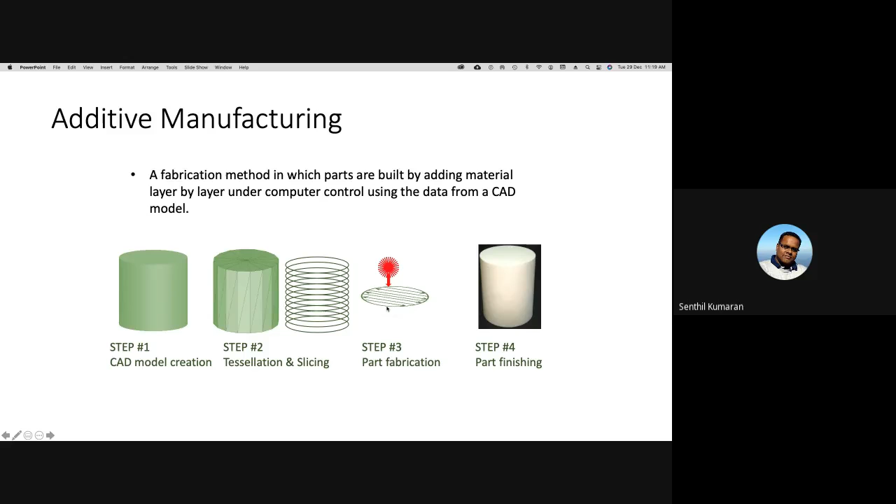The material that you use could be in any different starting shapes - it could be a liquid, particles, a molten material, or solid sheets. And then the way you are producing these individual layers - you've seen that layers may be produced by a high intense energy beam, or photopolymerization reaction, or by gluing it, or by ejecting a small amount of polymer. There are a lot of different process techniques available, and they can also come under many different ways in which these 2D layers are produced.

You can produce one-dimensional channels, or use two different sources and produce two one-dimensional channels, or have an array of one-dimensional channels which actually moves along the X - it's not like a hatching, but like one line which is actually moving. Or it could be the entire layer, a 2D channel, where the entire area is exposed and the entire layer is produced at once.

So there were many patented technologies, and they had mind-boggling acronyms. You have SLS, selective laser sintering. LENS, laser engineered net shaping, developed by Sandia National Laboratories. We have shape deposition manufacturing developed by Stanford, SLA developed by an independent company, 3D printing developed by MIT, and FDM developed by a company called Stratasys. Then you have Envision Tech and others based on digital light projection technologies, also called CLIP. There's a company called Carbon which produces these.

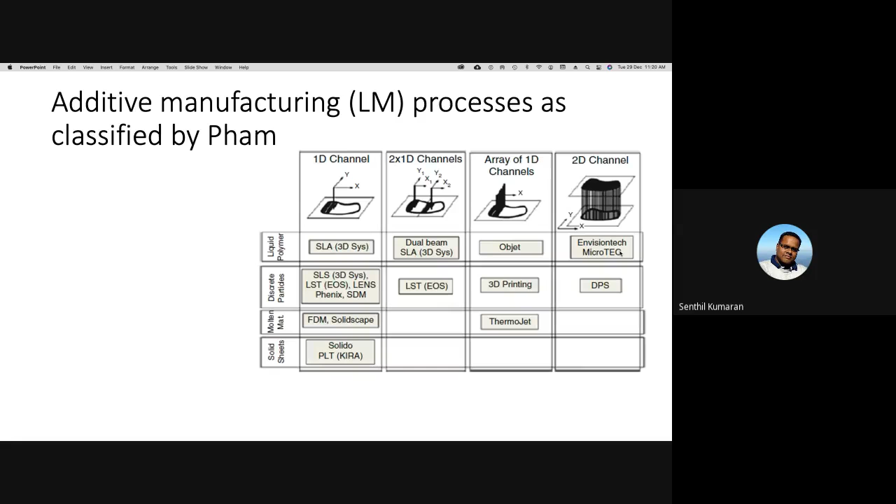So there are so many of these acronyms which were patented. They slightly modify the applications and then patent it. So in order to avoid using these acronyms, to generalize the names, ASTM has given this generic classification and also defined many processes.

Here I have a VAT photopolymerization process, which typically has a photopolymer or liquid in a container, and then uses laser energy to selectively polymerize the monomer, because these are photosensitive polymers. When a photon can initiate a polymerization reaction and solidify that liquid selectively wherever the light energy falls, that way you create a thin solid layer, one on top of each other.

So you can see that this works. I'm not going to teach you about the schematics, I just gave the schematics so that you can read it, and in your courses probably you will be reading more about this. There's a rapid prototyping course or additive manufacturing course where you will be reading about all this process and how it works, but I'm just trying to give you the lay of the land.

So there could be a powder bed fusion where you are fusing the powder particles together. You may be extruding a thin filament of material by heating it and extruding it through a nozzle, or sometimes you use a simple inkjet type process where instead of ink you put the resin and then jet it, or you can pre-lay the powder bed and use a binder to jet. Both processes work the same way, but here the material is a resin jetted onto the platform, and here you have a pre-laid powder bed where the binder is used to glue that powder bed in a different layer. Or sheets of paper or metals can be laminated one on top of each other.

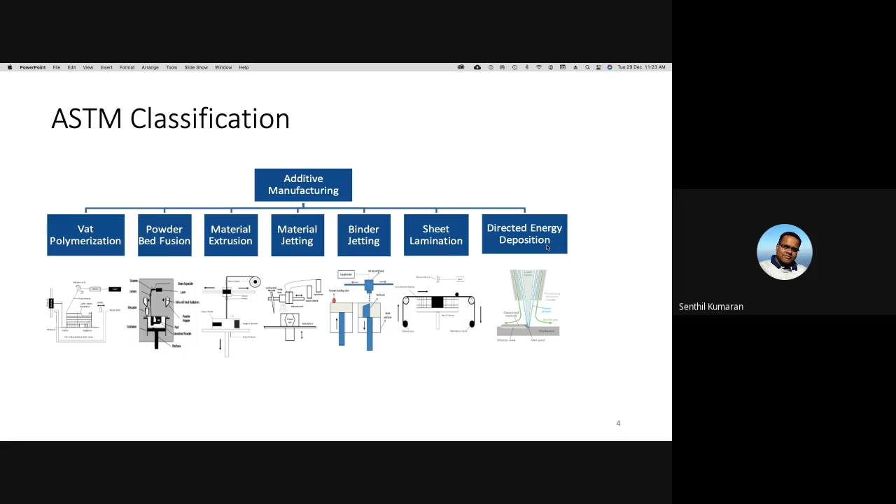Okay, so now if I just step back a little and look at it from a broader perspective, all these different technologies may have different processes. For example, powder bed fusion can have many different technologies, such as selective laser melting, selective laser sintering, and electron beam melting. Similarly, under directed energy deposition, you have direct metal deposition and laser engineered net shaping. So there are minor variations in the processes and mechanisms.

For example, these are the two major metal AM processes, but recently there are many different processes that also come under metal AM process. For example, binder jetting is a metal AM process. There's also something called joule printing, which works on resistance heating. You can also have cold spray based additive manufacturing as a metal process, but these are predominantly more commercially used. So there are many different techniques available, but we are more interested in looking at metal AM process from the perspective of powder bed fusion and directed energy deposition.

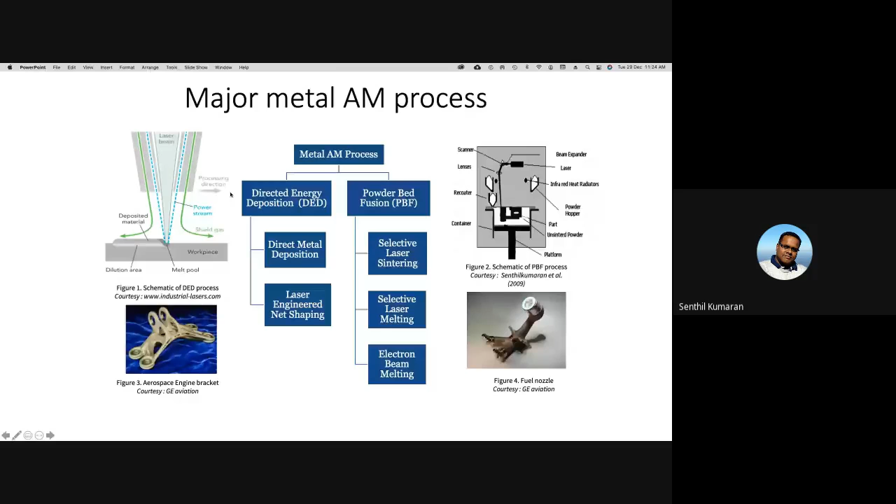If I look more closely into the powder bed fusion process, there are many different mechanisms. As I suggested, you have powder particles, and then you have to heat the powder particles to fuse them together selectively wherever you want to create the layer or the solid.

The rest of the regions remain as a powder, and then you create layer-by-layer solidification or consolidation of the powder particles, or coalescence of the powder particles. You normally get a three-dimensional object which has a very rough, poor surface, but later it can be processed to get smooth surfaces, right?

So the mechanisms by which this can be done - there are 4 different classes. It could be solid state sintering, where you don't use any full melting at all. Everything is done in solid state. You have 2 powder particles, and they are not taken above the melting point, but to a sufficient temperature where the viscous forces are used to overcome the surface tension forces.

Because the powder remains a powder due to its surface tension energy, you try to overcome that by a viscous force so that the powder particles join together and then become a solid, or necking can begin, and then it consolidates. These are the 2 powder particles, and there is necking, and then there's diffusion of material, which is typically called solid phase sintering.

Liquid phase sintering was also widely used, I think from 2003 to 2012, but it is no more popular. It's only useful for ceramics and composites, but not widely used in powder bed fusion involving aerospace parts or high dense parts. But this could be also another route - for example, copper bronze and nickel bronze type systems have been there, commercially available. In India also, we had a few machines very early, like 2003 and 2004, which involved these kinds of mechanisms.

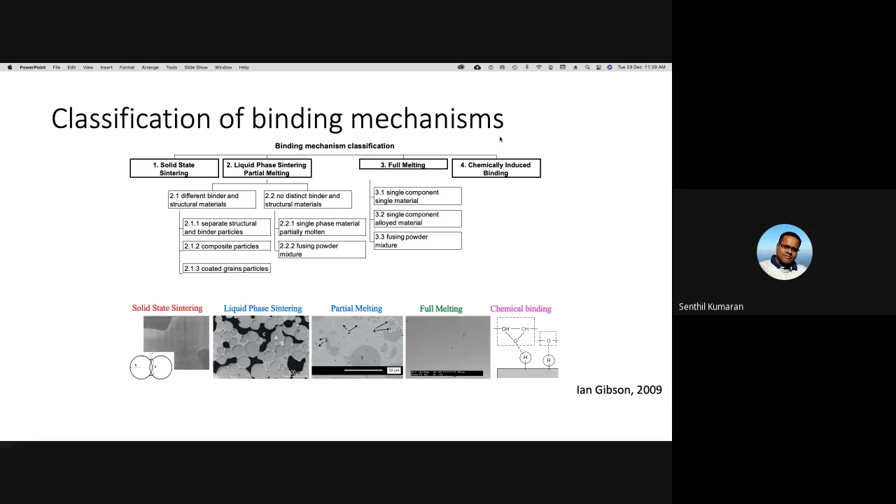Hereafter I will be starting to discuss the design aspects of this process, so that you will be able to understand what really these processes have done over the years, why people are interested in design for additive manufacturing and things like that. But before we go on to the design aspects, I will tell you about the research that is happening in additive manufacturing.

You see that there are multiple research fronts. One is in processes. People develop new processes. They work on something like joule heating, or maybe induction heating, or sometimes novel techniques to create that layer. So that is one research area that people have been always doing.

Another research area is in the materials aspect, developing novel materials with the existing processes. So superalloys like Inconels, and also titanium alloys, which are lightweight and have high corrosion resistance for medical and aerospace applications. A lot of these new materials are under development.

There is also a science aspect. For example, I work on science too, where we develop prediction algorithms and models based on first principles of engineering. This means you construct a model of the process and eliminate the iterations of trial and error. When you're trying to produce a part with a particular strength and dimension, you may have to iterate until you get that strength and finish. That iteration can be minimized if you have science-based prediction tools built on first principles of engineering.

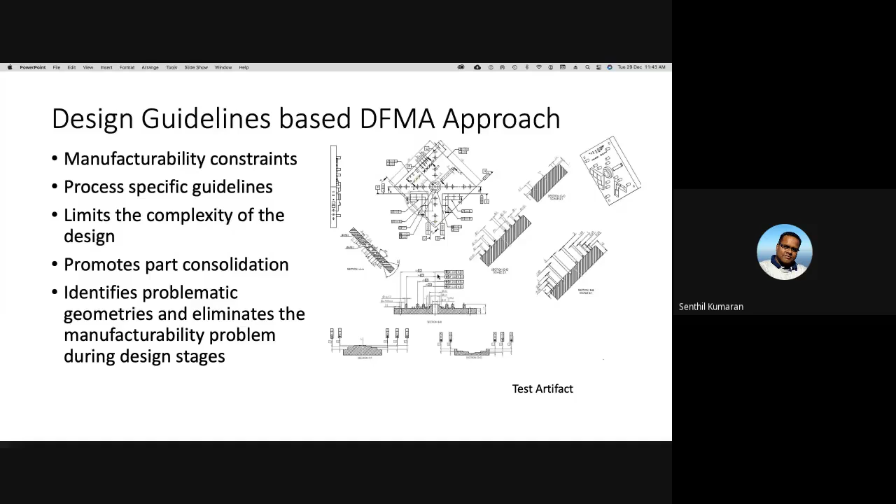So I'll give you an overview of the metal AM process so that you can better understand the design constraints and process planning constraints. Then we'll go to the opportunistic exercise.

For example, this is a typical structure of a metal AM machine. These machines are a little expensive, though recently they have become relatively less expensive because some patents have expired. But still, when you want to use exotic alloys, super alloys and titanium alloys, it's going to be expensive.

Machines are available for less than 1 crore, but otherwise it could cost 8 to 9 crores, even for a small build volume like 400 by 400 parts. So relatively they are very expensive and used only in niche applications, not for mass production as of now. But we'll see where the trend is going and how it can be used for mass production in the opportunistic exercise.

If you look at the setup, there's a CO2 laser, an optic, a mirror. Layer by layer, the part is produced and the platform moves, with a recoater, which is nothing but a blade. Sometimes they use a roller instead to spread the powder from the powder chamber or container. It slightly moves up so a layer of powder can be spread on the previous sintered or melted layer, then the next exposure happens, followed by spreading for the next layer.

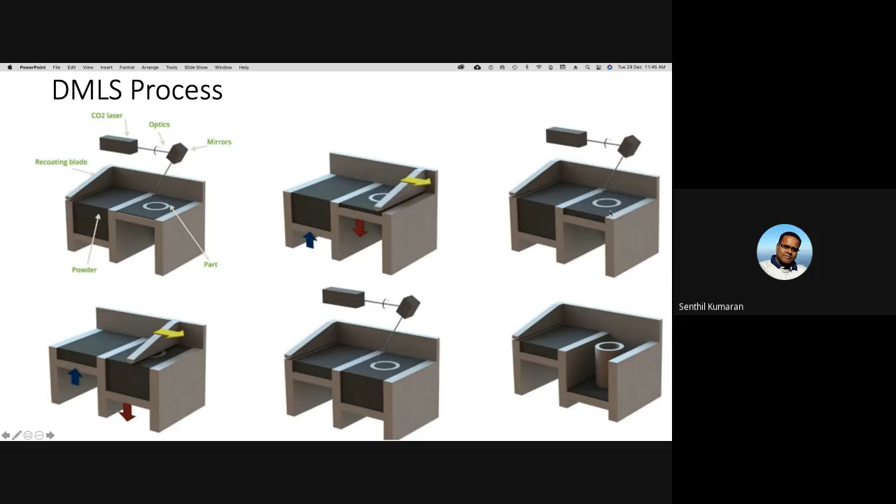Like that, the part grows inside. You can see the cylindrical part produced here with a hollow hole inside - a hollow cylinder being produced. Because of the layers, you can see two concentric circles, and then they fill this inside region with hatching, and you get the part like this.

The procedure is that you have a build plate, called a substrate, on which you can stack multiple parts - not just one. You can put, let's say, 5-6 parts together on the platform and build them layer by layer. At some point, once a particular layer is built, you have a cutting path to cut these parts out, then you mill the platform, or use wire cut EDM to machine it, and reuse it again in the machine.

So this is the platform on which the part is being produced. Multiple parts can be stacked on top of it, and then at this area you can see the cutting path is typically varied, so you can machine them easily and finally produce the parts with reasonable accuracy.

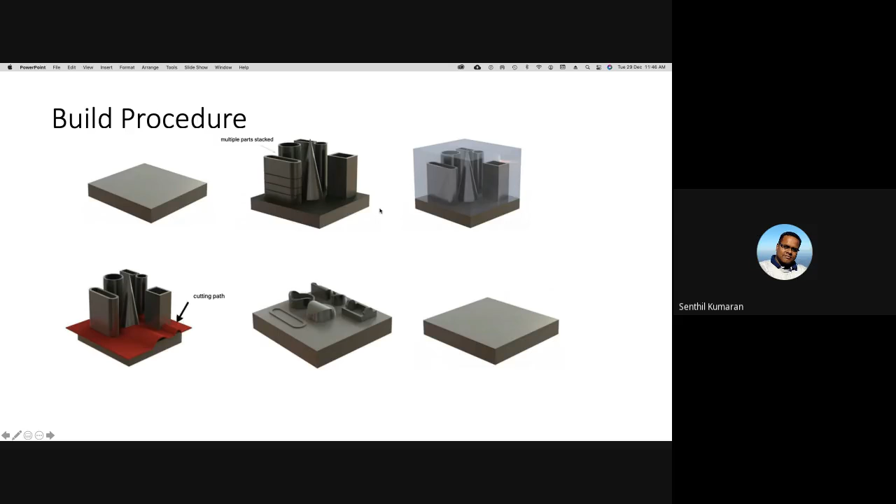Okay, so now, what are the design and process planning guidelines?

I will quickly take you through this, and then I will go into the design for additive manufacturing a little later.

One of the very important things is the orientation. Let's say, for example, this particular cylinder. When I slice it with a layer thickness of 50 microns, if I orient it upright with the base on the platform, the number of layers is always going to be extremely high, isn't it? So orientation is a very important problem.

For the last 25 years, people have been solving this problem of orientation. In fact, in Thiagarajar College of Engineering, there are many theses on orientation and optimization of orientation. Even some of my seniors and juniors have done a lot of work on optimizing build time, cost, and support structures.

All those things they want to eliminate by deciding a proper orientation of the part. Let's say if I orient this cylinder in a flat way, I could have had fewer layers, but the problem is you have overhanging surfaces. I'll show what an overhang is in the next slide. To avoid that overhang, you cannot build something in mid-air, so you need to build supports.

Let us assume you are building a house. When you are building walls, you are building one brick over the other, so the previous brick supports the next one. But when it comes to building RCC, the reinforced cement concrete roofing, there you have to put a scaffolding. Scaffolding means people provide some temporary support structures to support it, which they remove after the roof gets cured.

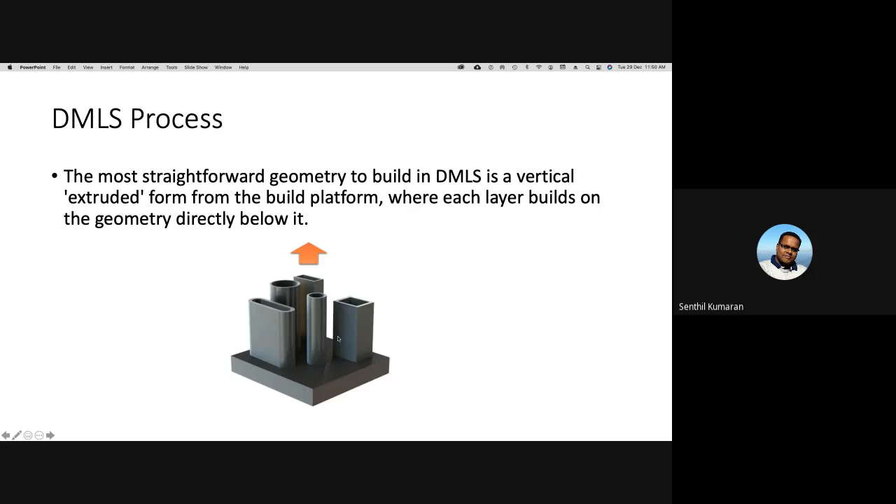So some of the design guidelines I would like to walk you through very quickly, and then probably we'll go to the detailed discussions about the capabilities.

Now let's say you have a small hole, on this platform. If you have a hole more than 6 mm, you need a support structure; if less than 6 mm, you don't. If the hole is only provided for access to something, you can minimize its diameter. In some cases people want to reduce weight, that's why they produce the hole.

Sometimes in some applications you must have seen they machine the inside region out because they want to reduce the weight of the component. Structurally, they want to make the component strong but have high stiffness, a good strength to weight ratio. For example, this material may be machined out just to reduce the weight of the component.

In that case, you can redesign. So you need a support structure here. For example, this is the overhang, you cannot build this top region, this region cannot be built. So now, to avoid this overhang, you can actually modify this hole like this.

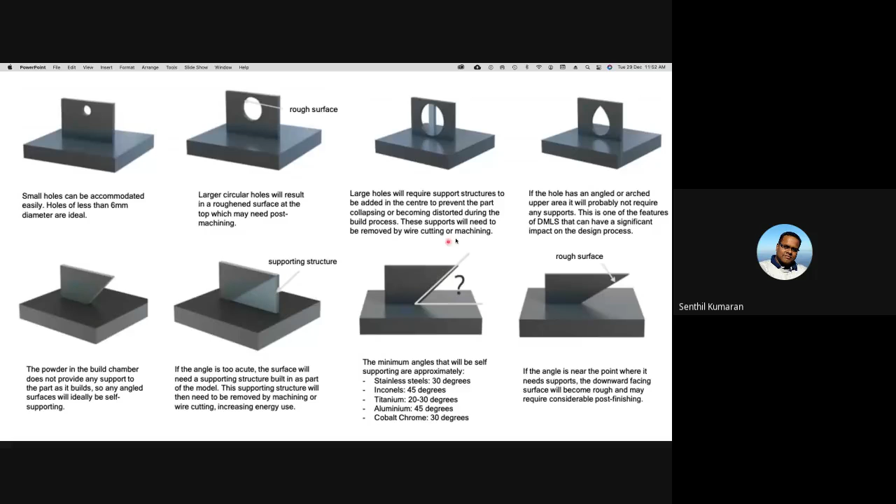That's what most of the things are about. I think you must also understand that additive manufacturing mostly works by services, right? Because these machines are very expensive, not all industries can afford to have them in-house. Only very technology intensive, high capital investment companies can afford to put it in-house. Normally medium and small scale industries use it as a service. There may be a service bureau with many machines, and you go to them, give your part, they manufacture it and bring it back. That is how it is normally done.

So the guys at the service bureau, we call this servitization or uberization in manufacturing, which is another reason why additive manufacturing is advantageous, because you don't have to manufacture it in-house. You can uberize it.

You can send parts across the world through mail with some blockchain, and then you can protect your IP, still manufacture and get the part back. There are a lot of workflow chain softwares available, so you can make it distributedly without having to have any factory at all. That's another reason, we'll talk about it when we come to the opportunistic part.

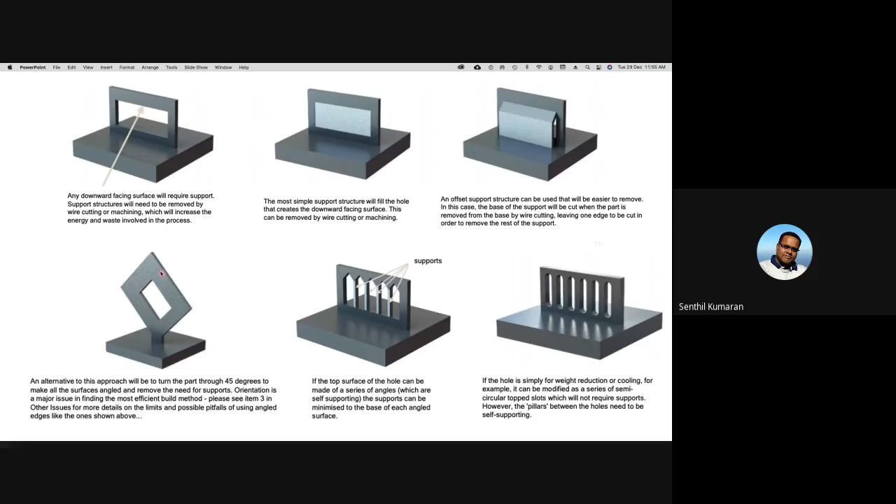But what happens here is you have the supports built in. These supports can be eliminated by having, let's say, a simple weight reduction or cooling. It can be modified as a series of semicircular, topped slots, which does not require support. This is a redesign, a constraint-based approach. Instead of this, I'm suggesting to use this so that you eliminate the support structure, eliminate cutting, eliminate the need to orient it, and these surfaces can become really rough because of stair stepping and other things. So it's actually the best design to go forward.

These are some process planning guidelines, like when you have a part and the recoater blade is moving, what normally people do is you cannot have the orientation of the part parallel to it. This is not advisable because it can actually take the part out of the platform.

Because the surrounding is powder, this is the only region which is solidified. When a very large section which is parallel to the blade is there, it can actually take the part out of the powder platform. So those things can be avoided. You can slightly orient it in such a way that only a small area comes into contact with the vertical blade, like an L shape. These kinds of things are some guidelines.

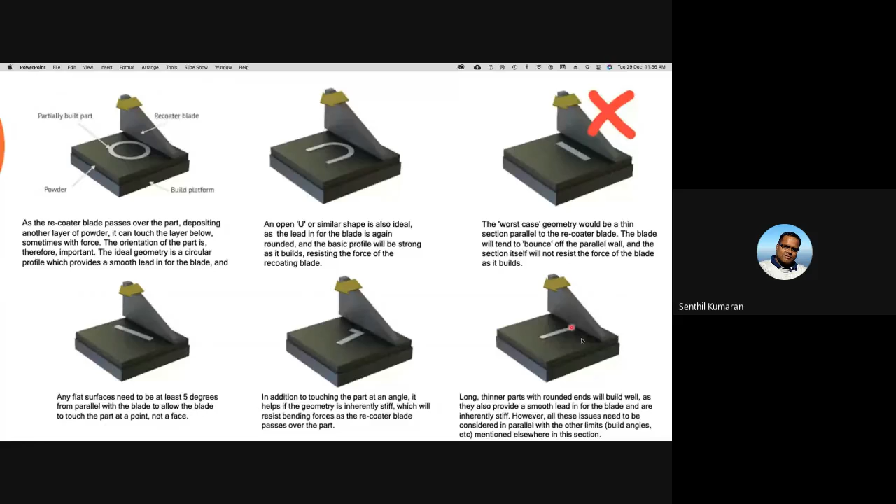Similarly, you have long slender structures with an aspect ratio of 8:1. When it's going to be built like this, there may be sagging and other deflection and buckling type effects. To avoid that, you can actually have a joining in the middle.

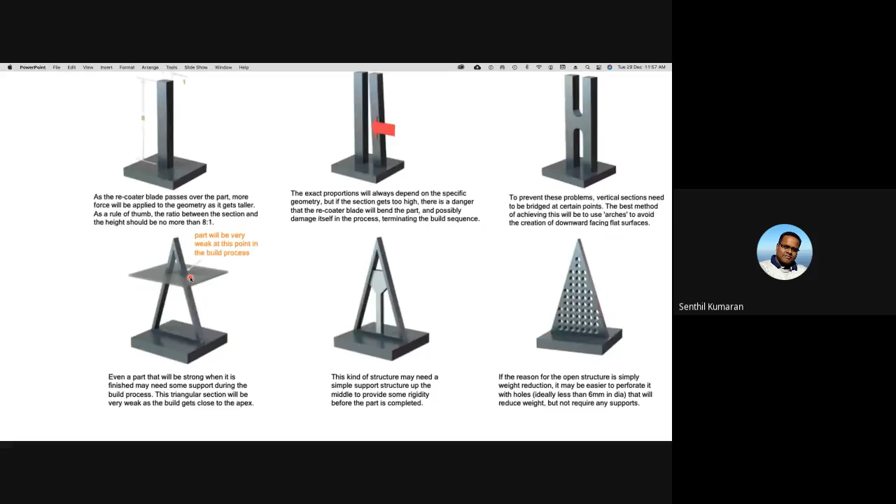Also, when you have two angled cross sections meeting at some particular point in height, it will be advisable to use something like that rather than this way, so that during the build process, the supports may have to be built at certain heights, and then removal becomes very challenging, because machinability is a very challenging thing. The problem is once you get the part out of the AM machine, you have to remove the supports only by machining, and the conventional machining problems all kick in, like tool accessibility issues, occlusion issues, gouging issues. So all those issues may prop up, and in order to avoid those things, you have to redesign something like that.

This is another bicycle example. This is the original design, and you can build offset surfaces like this, or slightly modify it as a serration and build offset surfaces, or orient it this way and modify the design extensively. You can see this is more organic and more easily buildable in metal. So the bicycle pedal from a conventional manufacturing process, like a forging process, can be taken to additive manufacturing to design something like this. This is what design for additive manufacturing is all about.

So you are basically advising that designer to modify the design in such a way that you come to this particular point where it is easy to manufacture, and also it looks more organic. There's no need to remove support structures, and it can be built very easily, but it may consume a little bit more cost when trying out these parts.

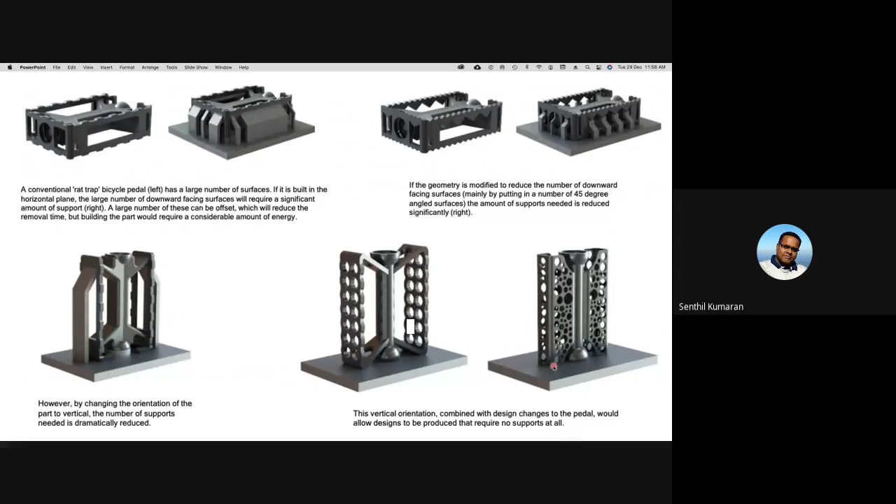There are other guidelines too, like sharp edges, because when you have a sharp edge, stresses start to concentrate on those regions, and the stress concentrations can produce cracking and ultimately failure. Also, having a thick section may cause it to be lifted up, there may be delamination, and angles facing into the recoater blade may cause the part to distort out of its position on the build platform.

Having sharp edges is not correct, so you can see there's a rounded edge here instead of a sharp edge. Also use the wire cut removal path in some cases. Let's say, for example, when you are trying to remove the parts from the platform, some parts may need wire cut paths, such that a simple straight cut may not be suggestible, because it is extremely difficult to understand the orientation in which the part is built when you do a straight cut. You lose all that information. So when you put an angled cut, then you know what is the Z direction and what is the XY longitudinal direction.

You must always be aware that additive manufacturing produces anisotropic parts. The Z strength is always poor because the layers are made in the Z direction, so the strength is always poor in the Z direction compared to the XY direction. The Z direction is the build direction in which the layers are stacked. That is why you need to always worry about the orientation of the part. You have to always do an over-design. Over-design means, let's say you have 300 MPa strength in X and Y, but maybe only 150 MPa in the Z direction. So you have to do an over-design for that 150 MPa, putting more material there to take care of that lower strength and ensure good overall strength.

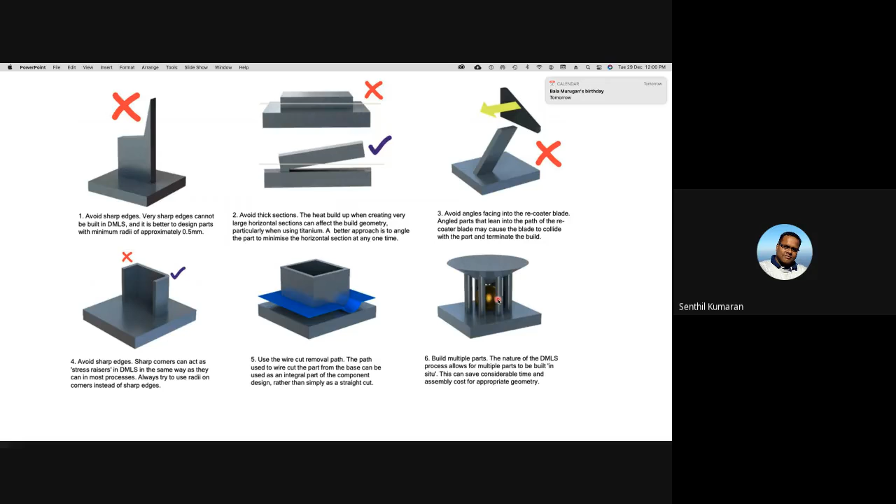So these are some aspects of the wire cut path. Also sometimes the parts get tangled inside, so you can eliminate those tangled parts. And as I said about support structures, remember we were talking about supports. A large amount of support structures needs to be built and then removed, so designing, building, and removing them is cumbersome.

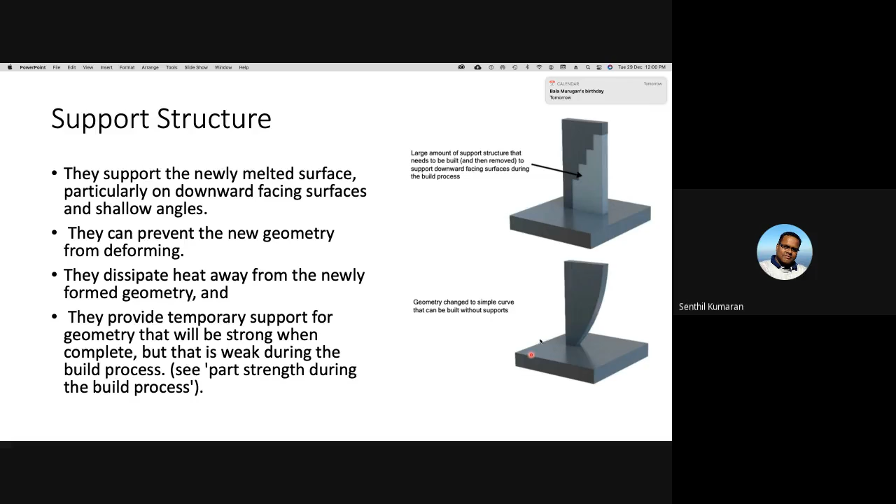So you can modify the design. Instead of a flat surface like this, you can actually have a curved surface, which could have very good benefits. Similarly, when you have produced a support structure, let me show you - let's say this is a small hole here. Can you see the small hole here? This can be provided to basically have a wire cut path.

Because you are going to insert a wire and then do wire cut EDM to remove that support structure in this vertical direction. I think you all know how wire cut electro-discharge machining works - you need a wire, and that wire needs to pass through this path so it can cut. Or else you can put an offset surface, or something like a buttress support instead of building it from the bottom. All those things are possible.

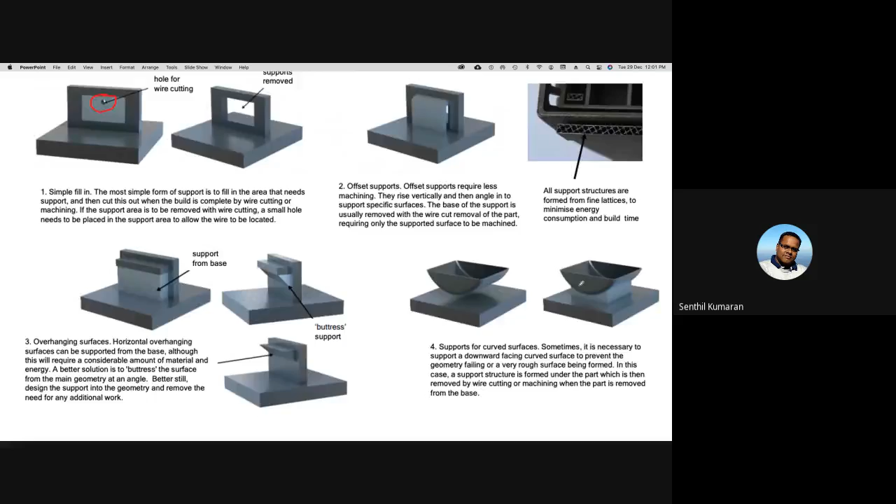Also, sometimes it is necessary that downward curved surfaces be eliminated so that no support structures are needed, and there can be many different problems like this. A lot of people paint a beautiful picture of additive manufacturing, but it has got a lot of inherent problems. In India, a lot of additive manufacturing research is not happening in many universities, because they still believe this process has lots of research to be done. Many industries are reluctant to adopt this because of the various problems you see.

Additive manufacturing is envisioned to be a net shaping process, but still you need to do machining, support removal, sometimes heat treatment, hot isostatic pressing, infiltration, electroplating, and sometimes sintering again in a vacuum sintering oven. So you see a lot of huge post-processing cost is involved in making the parts as good as a wrought part, a cast part, a forged part, or a rolled part. People would normally like to see the parts as net shaped products.

So there are a lot of issues. That is why the additive manufacturing community in US, in Europe, and in Japan are trying to address these issues. There is very active research going on because there are a lot of advantages, which I'm going to explain in the next part of the lecture. But to take advantage of those design capabilities, you need to eliminate these kinds of problems. So that's why a lot of research is happening. But in India, slowly research is picking up.

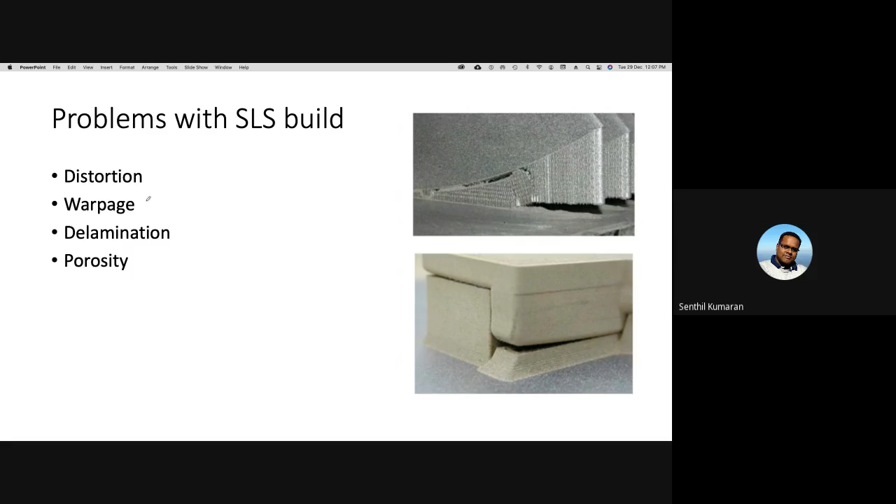You could use one layer parallel in one direction and another layer parallel to Y, or maybe something like a checkerboard pattern. Many different patterns have been evaluated to understand how this thermal buildup happens, how stresses get generated, and how these errors can be eliminated. It's an ongoing research area, and many papers are being published on this.

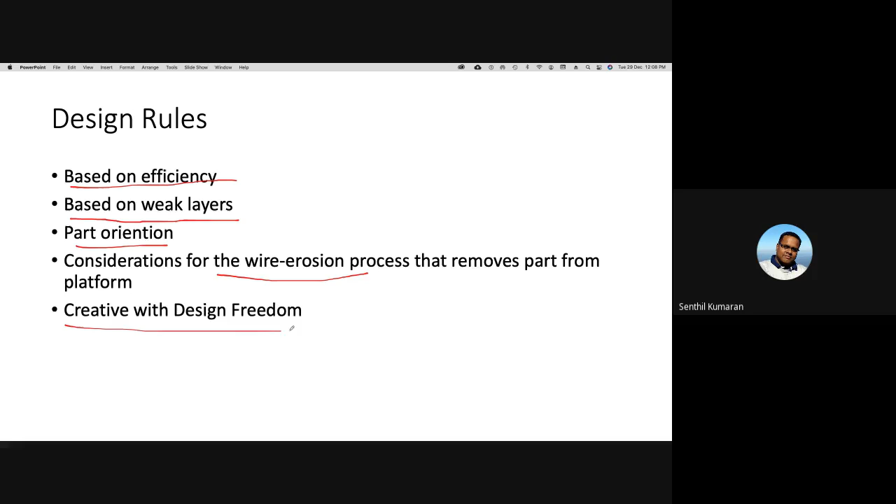So if I summarize all these aspects I discussed: most design rules are based on efficiency, weak layers, part orientation, and some considerations for the wire erosion process where holes must be provided for removal of material. We've also seen how to be creative with design freedom.

Now, what are the design opportunities aspects? This is the second part of my lecture, so I may not spend much time here, but I'll give an overall view. I teach a 40-hour course called Design for Additive Manufacturing to my students, and I'm just giving the introductory part of the slides here.

This is the first slide, the first lecture that I use. Then I use 40 hours of lectures to explain this entire concept to the students. In Stanford and MIT, it has become part of the undergraduate curriculum.

Design for Additive Manufacturing has become so important that it is now a core course in Stanford Mechanical Engineering, a core course in MIT, and also a core course in UC Berkeley for undergraduate students in the third semester. It has become so important that people have included it in the undergraduate curriculum itself.

We also offer this for master's students, but not at the undergraduate level. I have an online portal called dfam.in, and also a Swayam course where I teach this online, so you can join. I also conduct DFAM workshops where I discuss many different opportunities.

Let's look at the opportunities that additive manufacturing presents. Initially I mentioned that around 2011 people started appreciating the nature of additive manufacturing, and why it became so prevalent. The reason is like this: in conventional manufacturing processes...

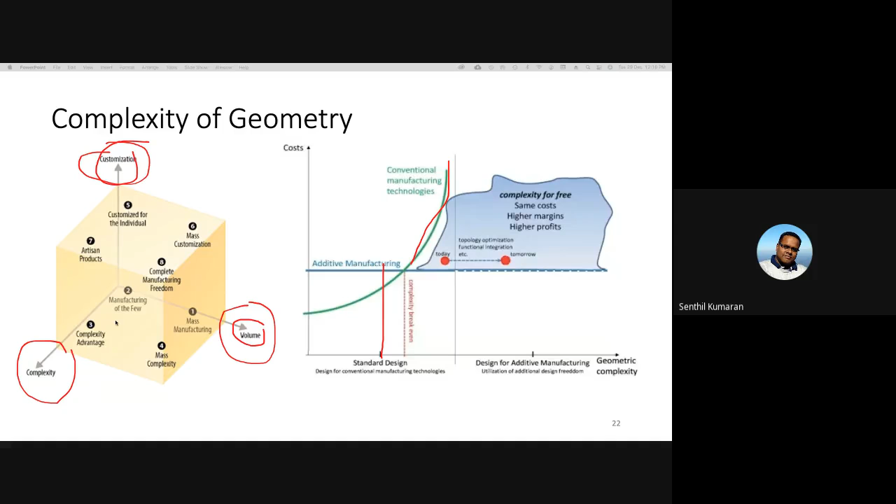Let me just look at what those complexities are.

Before we go into that, let us take a simple die casting example. I always give this example to students because they understand it really well. In die casting, you need to add draft angles because the part has to be removed from the mold, from the die. So in order to remove it from the die, you need to give a draft angle. This is the design space, but there is additional design space possible. This degree of design freedom is not so high in die casting.

Whereas in SLM, a additive manufacturing process, selective laser melting, you don't have to have a die or draft angle. Also there is no need to give uniform wall thickness, but here you can have mix and match. So there is weight reduction, and there is also very high design freedom. And also undercuts, these kinds of undercuts are very difficult to remove from the mold.

Because when you design like this, it is very difficult to remove from the mold, so those undercuts have to be avoided in die casting. But here you can have consolidated parts in which there is no die, no part removal from the die, so there is no issue. Also, small distance between features is not possible in die casting and injection molding.

Here it is also possible, so you can see the exemplary benefits: reduction in design space, weight reduction, consolidating multiple parts together, and again the reduction in design space. These are some of the advantages.

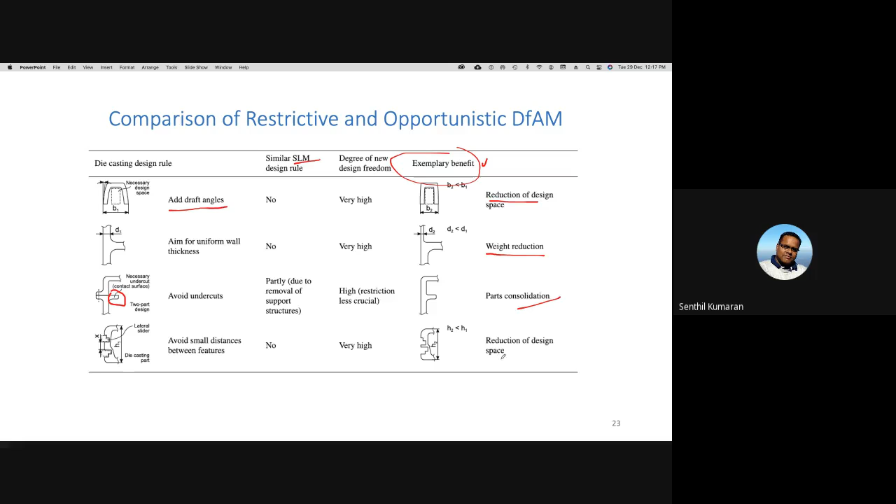So what are the major drivers? As I said, for additive manufacturing it is mass customization. I already explained what mass customization is: you are able to mass produce components at the same cost as a customized part. So you are producing customized parts at the cost of mass production. That is mass customization.

And functional integration. Like you would have seen, now people are trying to bring multiple functions into one part. I think I have not shown you multiple examples from real world case studies. You can just go to Google and type functional integration, and you would see an excellent amount of examples of people functionally integrating parts together, like flame retardance property, electrical property, acoustic property.

Let's say you have a car body, right? Now I want to print, let's say, batteries inside my interior surface. On the outer surface, I want to print my photovoltaic cells. And in between, I want to have a lattice structure, which is a phononic bandgap material that can only send certain frequencies of sound so that there is no noise in the cabin. So one single 3D manufactured structure has multiple functions: acoustic shielding or acoustic function.

Also, it has energy storage function by printing micro batteries. It also has solar energy generation function with solar cells. And also it has functions like impact energy absorption from shock, right? So then you have structures for that.

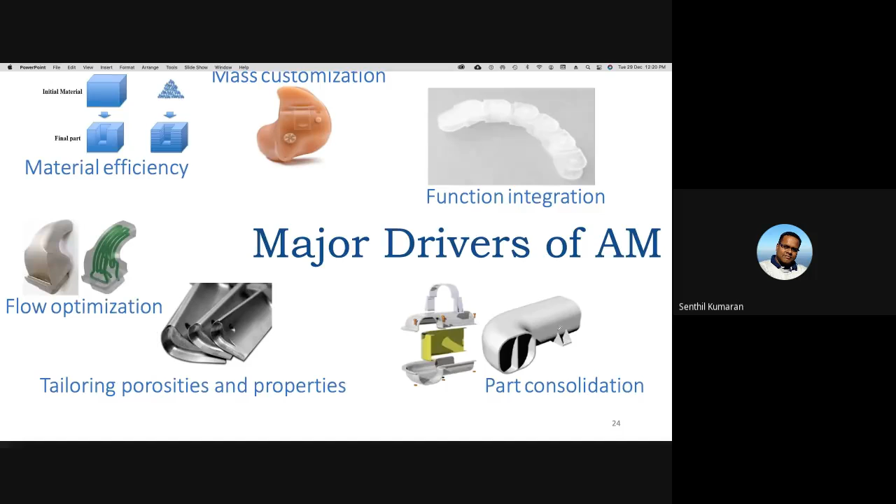So these are the complexities I was talking about: shape complexity, where you can include lots of freedom in the shape; hierarchical complexity, where the same structure repeats in multiple scales; and material complexity, where, as I said, you can have batteries, PV modules, sensors.

Now, I think many of you must have heard this term - in addition to additive manufacturing, you also have IoT, Internet of Things, as one of the very important aspects of the fourth industrial revolution, right? IoT is nothing but four different things: having a sensor to collect data, transmitting it over a network, doing analytics in the cloud, and presenting the results in a dashboard or through prescriptive or predictive analytics. That is what IoT is all about.

IoT needs physical devices also. For example, you need a sensor - that sensor can be directly produced using additive manufacturing. And you need a network, for example RFID antennas or other antennas, probably circular antennas. In fact, I ran two impact projects on 3D printed antennas.

One is for energy harvesting applications for military, and another I'm doing for sensing physiological parameters in soldiers during training as well as on the front field in battle. So I ran a one crore project on just integrating the function of sensing and transmitting data - IoT plus additive manufacturing. So there are huge opportunities in terms of how you can add materials, electronic material, functional materials.

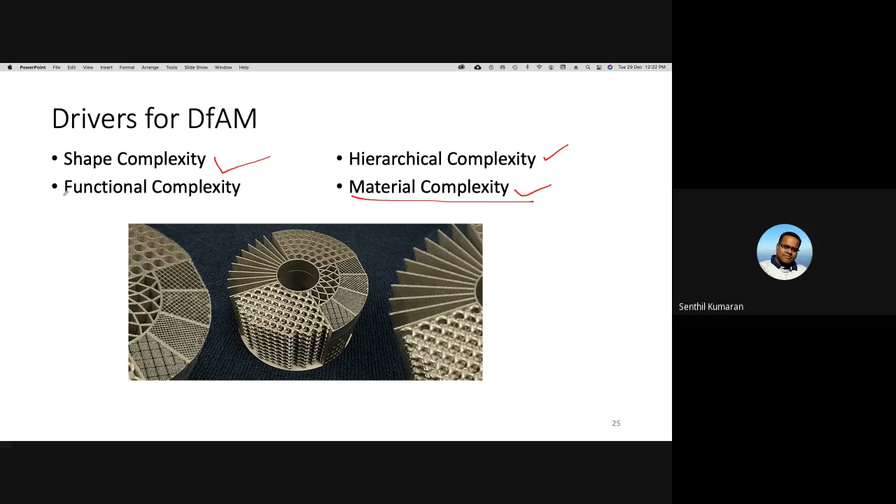So these are many applications, but this is the lay of the land for DFAM. So if you look at my course, I tell them about the geometric complexity that is possible, and here I tell them about how to basically use topology optimization.

Topology optimization is something where you can actually optimize the material use within a space subject to a set of constraints and loading. So I'm trying to minimize the compliance so that I can remove material.

So there are hundreds of such software tools for DFAM which has recently come, which industry has adopted. Maybe I can give a Fusion 360 generative design example. I have a case study. If you give me 1 hour, probably I will use my research scholars and give a very good hands-on exercise also, you can practice it.

So the problem will be created, a topology optimization problem will be created, and it can be solved in a cloud, so you don't need even very good systems for you to try it out. Probably I'll discuss with Palniappan sir, we'll do that later sometime - maybe a hands-on exercise on some of these tools which we use.

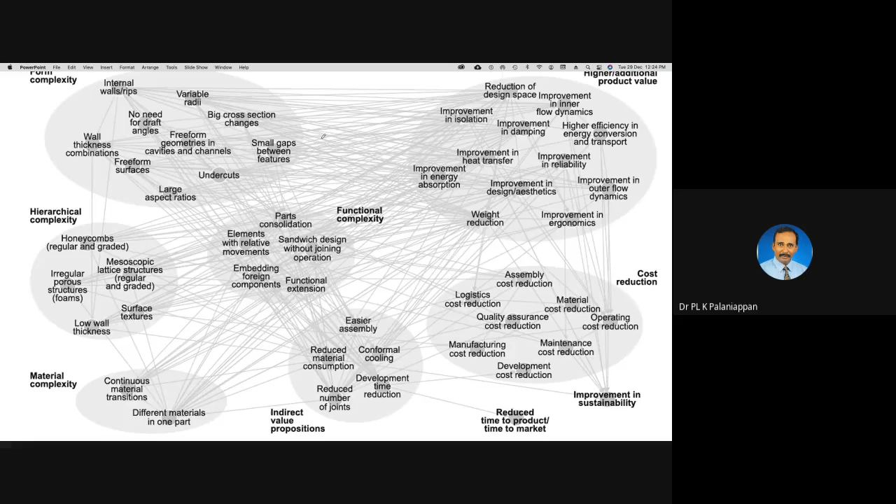So these are some of the form complexities and hierarchical structures like porous structures, lattice structures, mesoscopic structures, and material complexity like different materials into one part, and FGMs - functionally gradient structures, where you have different types of materials which are graded in nature.

Like you have a copper-nickel system. Copper is 100% in one edge, and nickel is 100% in the other. Then you have a continuous transition between the compositions, so that kind of compositional heterogeneity can be added.

And then functional complexity is about consolidating the parts and the extension of functions, embedding foreign components like sensors and other things. So you have lots of these indirect value propositions - you can actually have a lot of other benefits.

Like if you look at each one of these theses - IIT Madras, Professor Soundarapandian, he also comes from Thiagarajar College of Engineering, a proud alumni of Thiagarajar College. He has 5 PhD students, and everyone is working on one problem.

For example, one student is working on understanding damping characteristics of lattice structures. Another one is working on energy absorption - so when there is an impact loading, if you have a unique structure using additive, how the energy can be impacted. Another one is working on isolation problems, like noise isolation and acoustic problems.

Improving design and aesthetics is another issue. Weight reduction, or lattice structures, or lightweighting is another strategy by using repeated structures. Ergonomics and flow dynamics - like there's a heat transfer problem, having a complex network of channels in a hydraulic manifold, or any other cooling problem like mold cooling. So flow dynamics, energy conversion, all those aspects are being studied.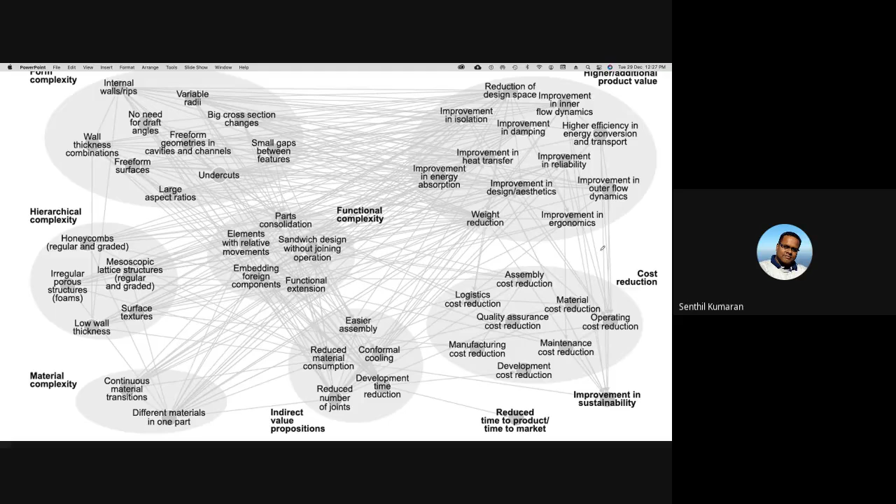So you can also learn more about it over the internet - there's a lot of material available, and you can learn and understand what are the various benefits of this. So thank you all, and if you have any questions, I'll be able to answer them.

Most importantly, this field is very new, but there are a lot of commercial packages which have come in the last 3 years, and you can actually try practicing your hands - many of them offer trial licenses.

You can download those trial licenses and try to modify an existing design which is there for machining or casting, and then modify it to suit additive manufacturing. What are the design capabilities you can add? What are the additional functional complexities you can add, then redesign it, present it in a conference, or even do a small project work or internship with industry, showcase them, and they will be happy to take your idea and redesign some of these parts. So I wish you all a successful learning experience.

I just opened up an area for you to explore. Now you can actually explore on your own many of these things I have discussed. If you have any questions on whatever I discussed, please ask. You can put it in the chat window, or you can unmute and ask.

Thank you, Dr. Palaniappan sir, for offering this opportunity. Thank you, Senthil. We are very much happy to work with you. If any chances are there, we are always ready to work with you.

Hello. Yes, sir. Yes, fine, sir. So if there are no questions, I think I leave it to Dr. PL. I think there is a question from Dr. Bala.